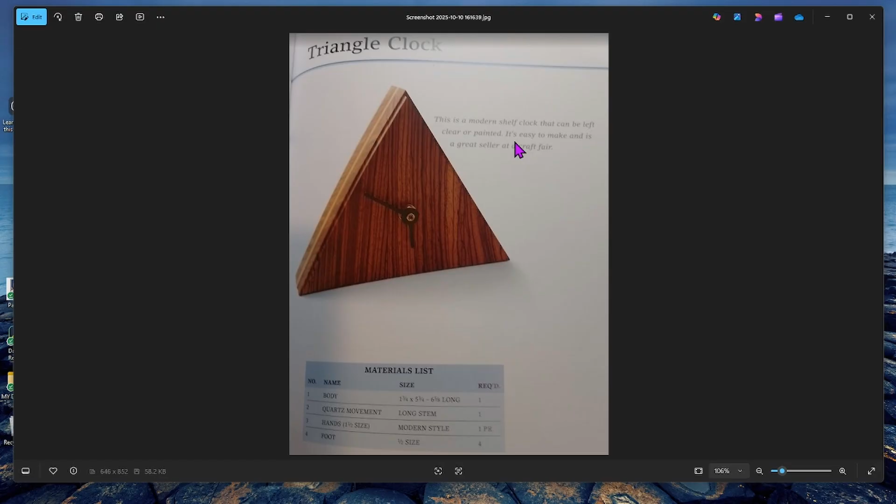This edge right here on the front, it's not a chamfer, it's not a fillet, it's kind of a reverse curve. So let me go to the next page. There you go. So it's probably hard to see, but up in the right corner, I'll try to zoom in a little bit. Maybe that'll... anyhow, right up in there, it's a reverse radius all the way around the edge.

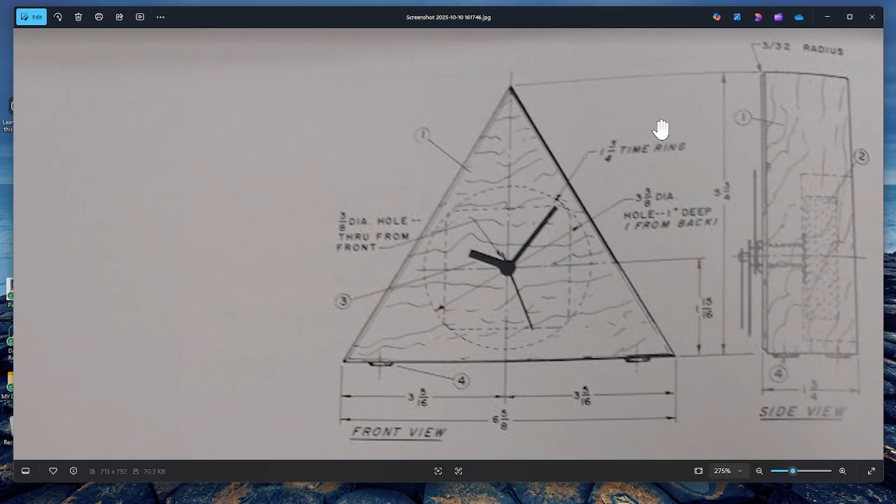There's no feature that I'm aware of in FreeCAD where you can just grab that edge and hit something and it automatically puts that type of—I can't remember if it's called a concave or convex—curvature in there. So we have to manually put it there, and that's the intent of today's video.

Let me zoom back out here. So we're only going to focus on the block of wood here and putting cavities in it and the holes through it. At a later date, when we get more into assemblies, then I will likely pull this up in future videos.

So if you plan on following me in the future, you might want to save this one. And what we'll do is model the actual clock that you insert the hands and the washer and the nuts and the feet that go on the bottom of the clock, things like that. We'll do that at a later date.

But today, we're just going to do a simple triangle. We're going to pad it. We're going to put the holes in it, and then we're going to work on that special edge.

All right, if you've been following my videos enough, or other people's videos, by now you know how to open FreeCAD. I don't need to do that. I'm just going to go right to parametric part, right up here in the upper left. First, I need to turn the mouse on—I keep forgetting to do that. It is on, minimize it. There we go, that'll help you track it a little better. So I'm going to select parametric part.

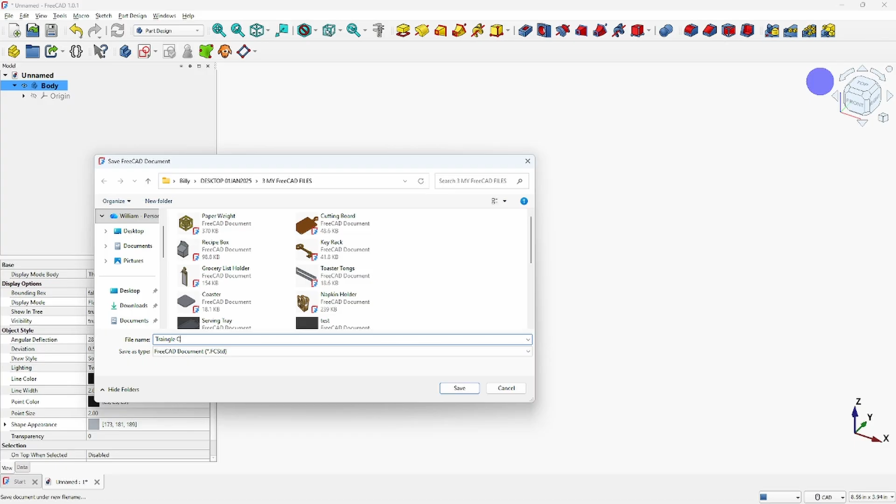I'm going to do what I always like to do: I'm going to save this file, same with my other stuff. Now the triangle clock—I have never done this before, so I've done special edges, it's been a long time, but hopefully I can make it work. If not, you're going to see my humiliation today. I'm going to call that a triangle clock. Triangle clock, and save. There we go. All right, so down here on the lower left, you see triangle clock. On that tab, we're ready to go.

I'm going to rename this body, I always like to do that. Who can remember what function key you press to do rename? I'll give you a second there. I can right click it and rename it too, but it's function key, I hope I'm right, 2. I was incorrect—yeah, I was correct, I just did not have it selected. All right, so it's function key 2 on that body, and I will call that triangle clock.

Work on my spelling. And this will come in handy when I pull it up later and I show you how to model the other parts and we build an assembly and put the clock together. So for today, we're just going to have this block here, or the, yep.

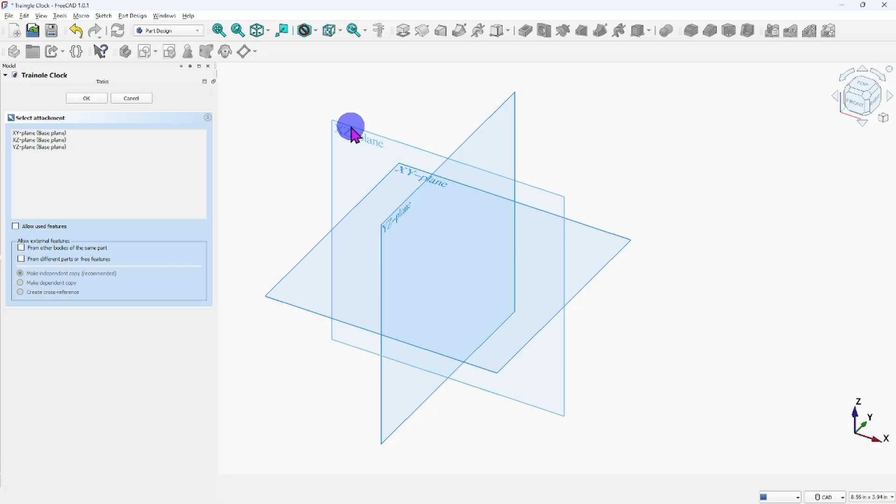All right, let's get into—once you create the body, I keep calling it a block—once you create the body, then your next step here is to use the sketcher and select a plane. You know, you could use any three of these planes, it doesn't matter, but since the clock is upright, I'm going to select this XZ plane. I'm going to double click on that with my left button and bring it up there.

Alright, I know we got a triangle. I want to build the triangle on this line and use this for the center. Man, it's really been a while since I've done a triangle. It does have a center feature. We have a triangle and there's a red dot in the center, showing there's a center point, and then you have the other points of the triangle.

The issue I'm going to have is not all angles are going to be equal, so it's not going to be an equilateral triangle. I'm hoping it'll let me change the angles. It should, so let's go ahead and give it a try.

Hit left click triangle, select the center point. I'll go ahead and use the origin there. Select that, and then you can see spinning it around. I'm going to set that tip right there.

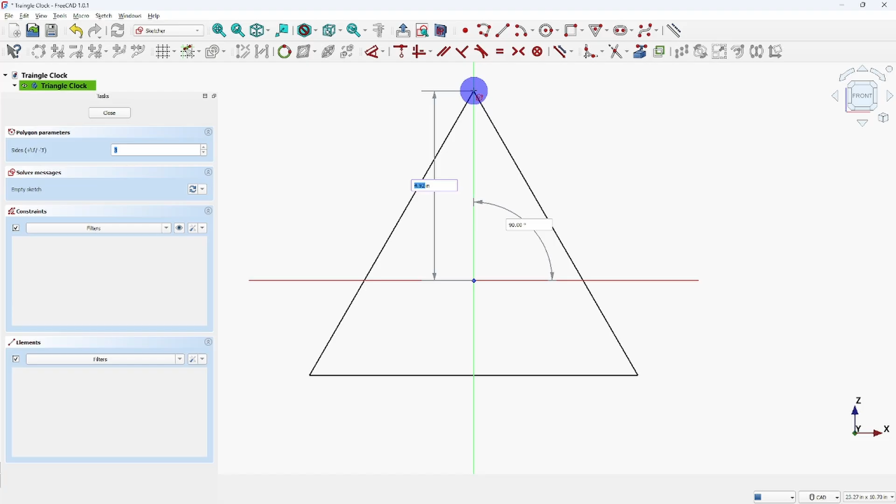I can see that it's about 5 inches tall, and I've already looked and the clock is about that height. So I'm going to go ahead and left click, and there we go. Yeah, this is equal.

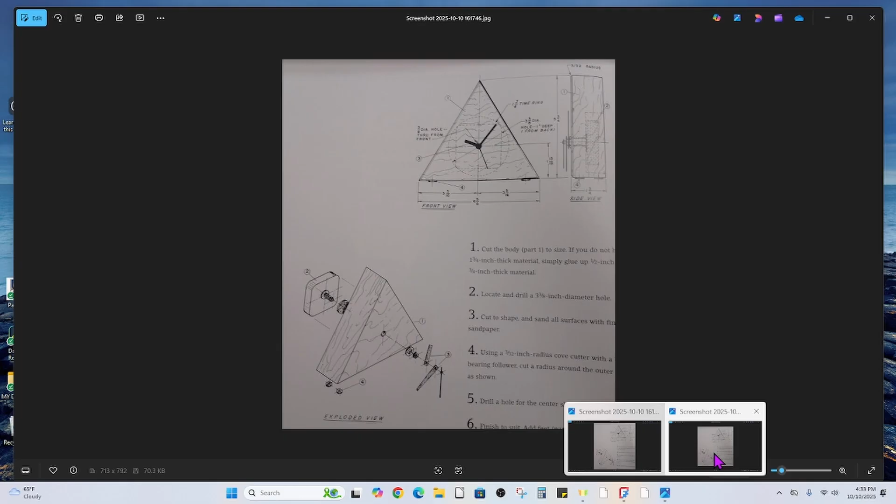Let's keep going here, maybe we can change the angle on it. Alright, I'm going to pull that up. It's 6 5/8 across the bottom, and then we want 5 3/4. So 6 5/8 and 5 3/4. See if my short-term memory can remember that.

Alright, so I'll select that line and we'll go with 6 5/8. Now, this input is not good with fractions, I think I've already tried that. So what I'll do is use decimal. 6 5/8 is 6.625 inches. Haha, that's interesting.

So what I would have to do here is make this line, right click. Maybe I should not have started off with a triangle, but we'll try to see if we can make it work. I will select this line here and try to constrain it to horizontal. Let's try that. Okay, it's saying it's fully constrained, but the height here is probably not going to work because these are equal.

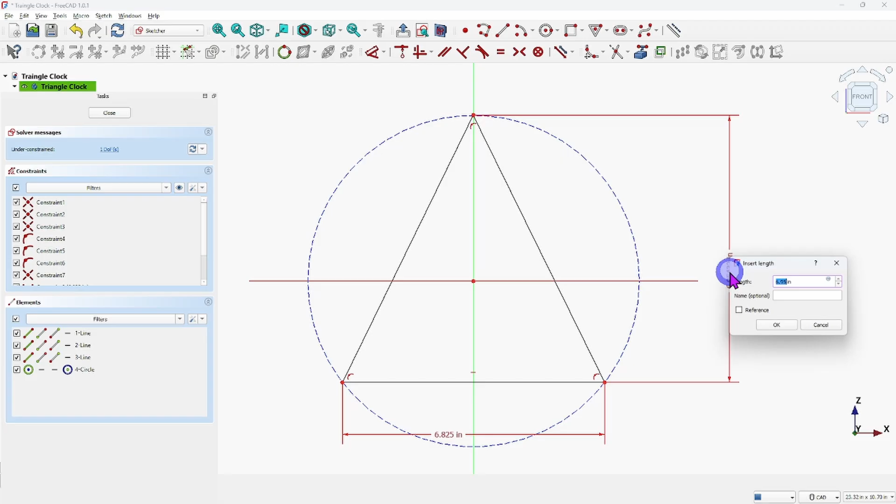Alright, so in the sketch, we want a height of 5 3/4. Come back over here, FreeCAD. This time we're going to go from this point to the top point here. I'm going to hit this auto dimension, pull it over to the right, and type 5.75, enter. Alright, that gives us our shape.

We're under constrained, we got 1 degree of freedom before we can pad this triangle. Let me see, I've got height, got that. So I believe what I have to do is one of these dimensions has to be referenced to either this vertical or horizontal line. So what you want to do is just grab any line and kind of drag it. I'll grab this line with my left button, hold it down, and you can see how that top line right there, that point is not coincident with this vertical line here.

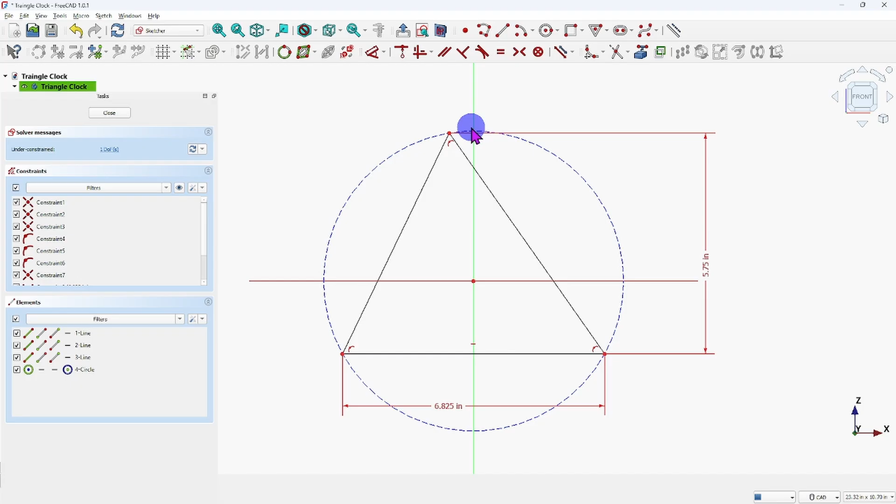So what I could do, a couple ways to do this, I'm just going to make this point here and this point align vertically. Go here and put a vertical constraint on it. There. Perfect, so now we've got that triangle locked in. We're fully constrained. I'm going to close it.

I'm going to scroll back a little bit. I'm going to pad it over here on the left. And I forgot the thickness. That looks like 1 3/4, I'll go with that. You can see my high-tech photography here is just kicking in. Alright, so 1 3/4. Go back to FreeCAD. It's already highlighted blue, so we should be able to just type it in. 1.75. Uh-oh, nope.

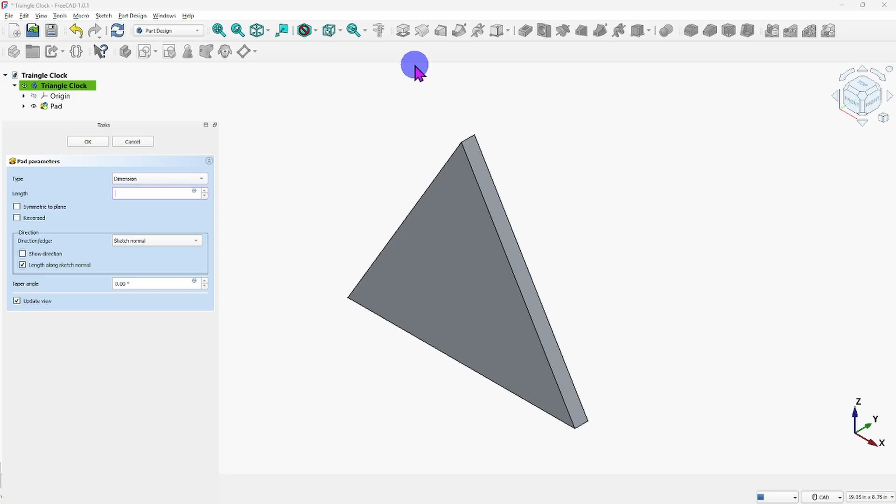Alright, let's go up here and select this isometric. I lost it. Okay, there we go. And then I'll come over here and I'll just backspace, and then I'll type in 1.75 and enter. There we go. Alright, we have our triangle.

Alright, so with this being the front, we will have a hole drilled through it. We also, on the back side, have to put a cavity in there for the clock. So let me go ahead and start with the back side. Select that face. If you remember from the last video, you can now select these faces here. Left click on the faces and select sketch, and the sketch will automatically align to those faces.

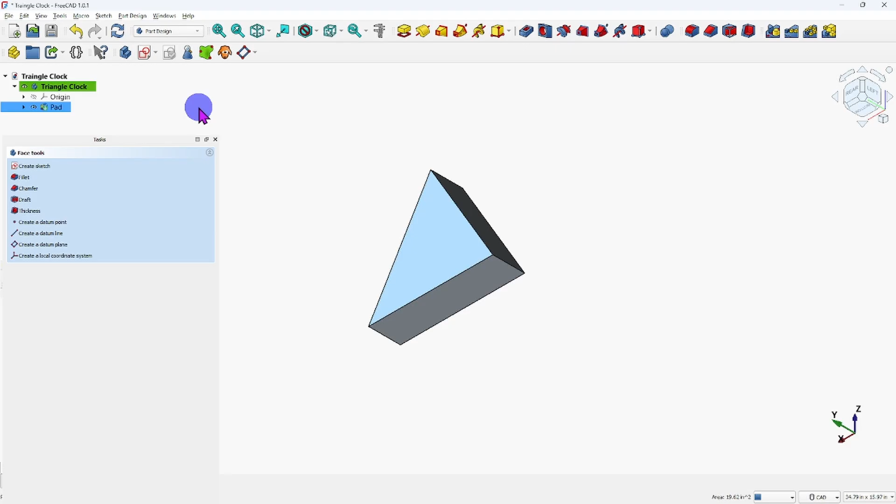So I'm going to start back with this isometric view here, and that is my front. Now I'm going to, like this arrow up here, or remember this dot up here will just do 180. So I'm going to do that, flip it around 180. There's my back side of the clock. I selected that, then I selected sketch. Yeah, I know it went upside down, that happens. I can't explain it at the moment, but here we are. We're on the back side of the clock. What I'm going to do now is just kind of rotate it around a little bit.

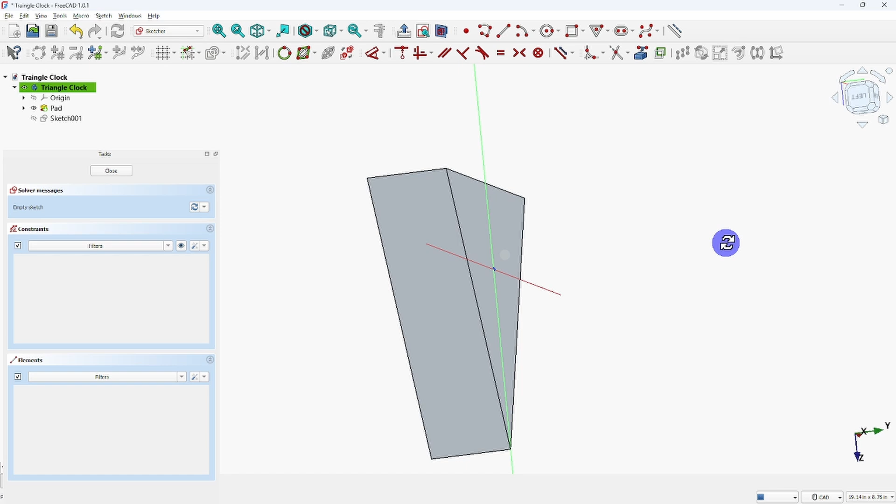There you go, to show you that we are on the back side of the clock. I'll select rear there. That is really strange, that's messing with my head. So I'm going to go up here and hit this arrow on the right just to bring it around. One more, there we go.

All right, let me see where we got to locate that cavity. I see the dotted line. It's going to be 3 3/8 diameter and 1 15/16 up from here. So 1 15/16 up, 3 3/8 diameter.

All right, we can do that. Circle. I don't want to put that there because it'll lock in on that origin point and we won't be able to move it. It'll be constrained to that point. What we do want to do is lock it onto this line, and it really doesn't matter where you put it. Just to show you that it doesn't matter, I'll just put it here for right now.

And we know it's going to be about 3 inches. I'll just hit it there. All right, 3 3/4. Yeah, my short-term memory's kicking in, or not kicking in. 3 3/8.

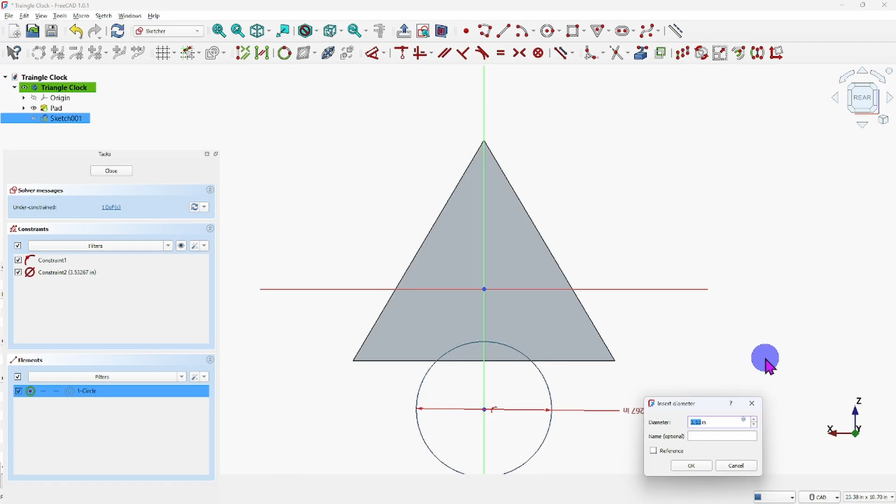But I'll see what I can find out and let you know. All right, so 3 3/4, 3.75. Select it there. Right click to get out of that. I'm just going to grab the circle either there or by the center point. I'll grab it there, and it's locked to that line, so I'll just slide it up into position there.

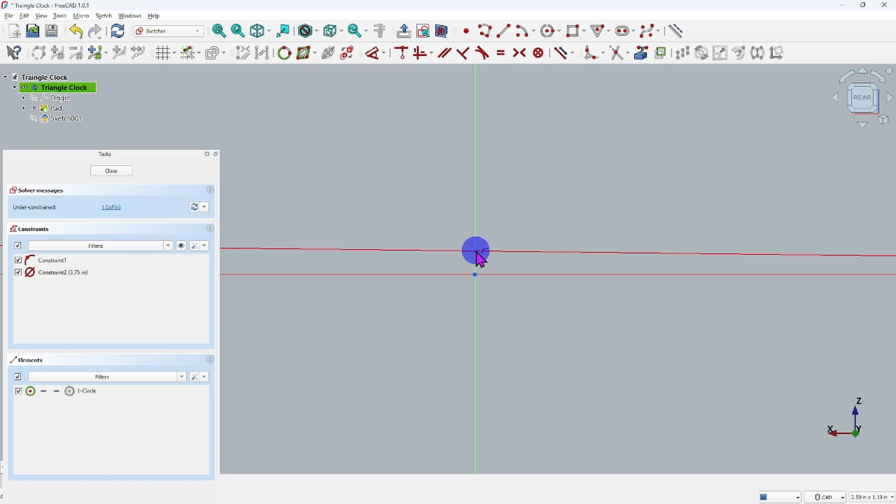And now we're going to put an actual, I'm going to zoom in a little, I'm going to put an actual dimension to it. And it was supposed to be 1 15/16. So let's zoom in, make sure I got that point. Select that point, come down. Oh,

it won't grab that line because I haven't brought it in yet using the reference command. So I'm going to right click, click again. In order to use this line right here, I'm going to have to use this, which is external geometry. Since we use the face of that triangle to give a plane for the sketch to land on, we still have to grab these lines and pull them in to reference them. So that's what this command does right here.

So I'll select that, come over here and grab this line. There you go, you see it turn blue. Select it, now it's kind of purplish. I'll right click to get out of it because I really don't need it now. And that's going to stay as a reference line. It won't affect your degrees of freedom or anything like that.

It's there for reference. So now I should be able to go from that line up to the center of the circle, or from this dot up to there. It doesn't matter, I don't think it does. We'll see. I'm going to grab the line and we'll go up, and I can see that center point selected. I select it, you see both of them are selected right there on the left.

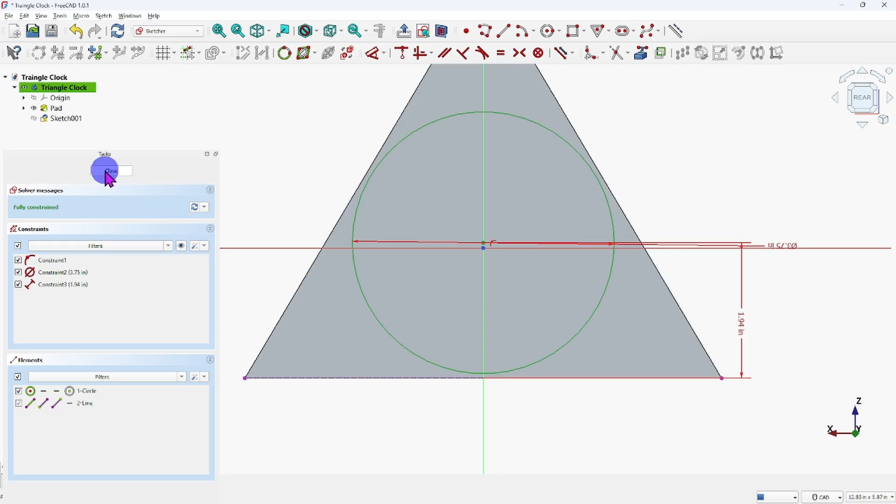So it's fully constrained, I'm going to close it. We've got a line there, and if you remember before, I kept calling this a hole - it's actually a pocket. Use the pocket command. There you go, puts a pocket.

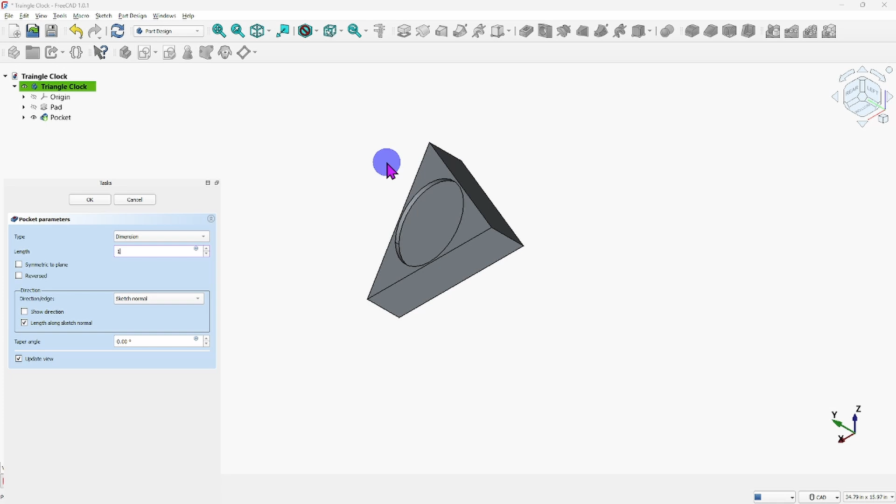How deep do we need to make the pocket? Let's pull up the image. How deep is that? There it is right there, 1 inch deep from the back. Go back to FreeCAD, click in that box, backspace it, just type 1, select enter, and there we go.

We've got the cavity in there for you. Now we've got a couple of options here to put the hole through. I can select this face here and drill the hole through the face front, but then I'd have to do some math trying to figure out where it needs to go. We know it's 1 15/16 up, and then I can center it. But just to make it a little easier, let's take advantage of this circle we already have and select that face right there inside the pocket and see if that works.

Selected, and then we'll hit sketch, and there we go - it's upside down again. That's bugging me. All right, so this time I'll remember to bring the geometry in. Select that, select that circle. There you go, down there. It brought that geometry in.

I'm going to right click to get out of there. It's not showing any degrees of freedom over here because when you bring in geometry like that, it's a reference - kind of hidden to FreeCAD right now, but we can use it, take advantage of it. So we know now the center point is right there waiting for us, so we don't have to do any math.

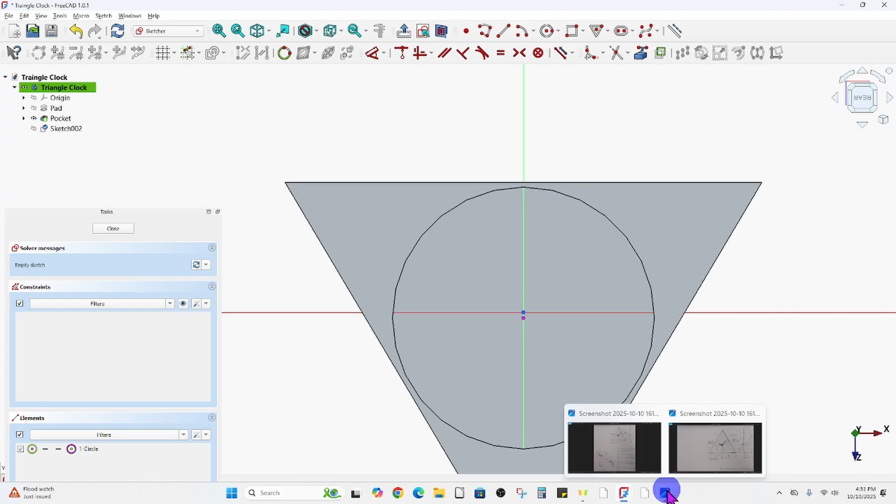Let's put a circle there, but let's find out what size the hole is. And it is 3/8 diameter. Go back. So now, put that circle, zoom in a little so I make sure I got it.

There you go, it doesn't matter how big you make it. Put it - oh, you know what, this is a good time to show you something. While I'm dragging this around, before you select your left button, while that dimension is blue, you can put your dimension in right now. So what was it, 3/8, 3/8, hit enter, and there you go. I'm gonna right click to get out of that.

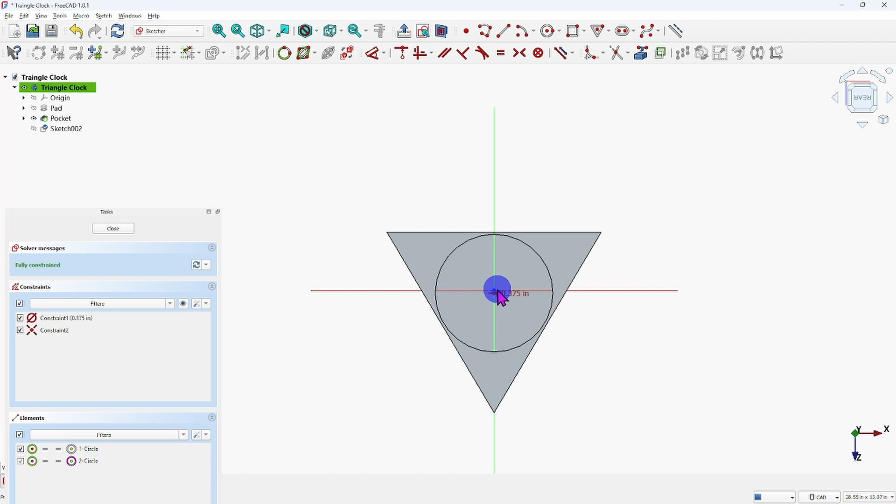It's fully constrained, let me make sure. 3/8, yeah, okay. 3/8, and that is diameter. All right, I'm going to zoom back here. Let's close, we're fully constrained. All we had to do is get that reference, find the center point, drop a circle on there, close it.

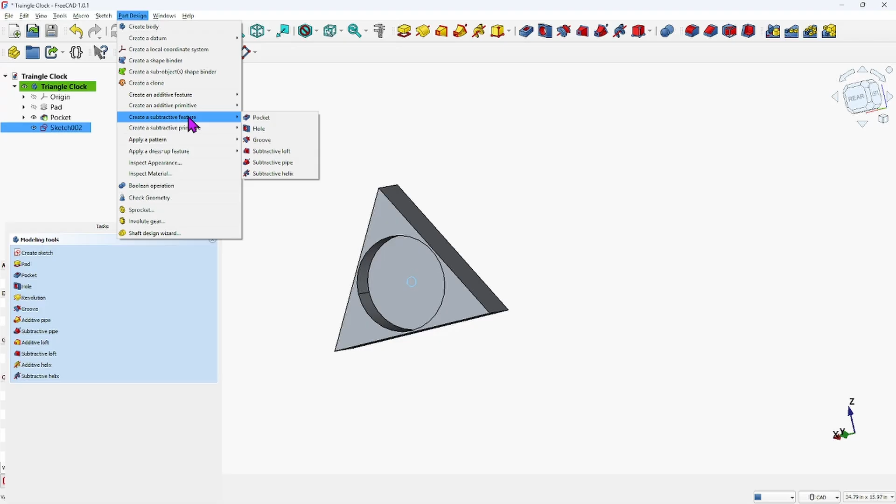There's our circle, and now this time we want the pocket to go all the way through. Pocket there or pocket here - let's try it over here this time. It really doesn't matter, it's just two ways of doing it. And we can do it here too - what would it be, a feature? That's additive stuff, subtractive features. There's a pocket right there. Let's try that, just 3 ways to do that.

You see the impression it made. We want to say through all, and roll around. And there you go, went all the way through. Yay. All right, I'm going to select OK, I'm going to reposition it.

It'll put a fillet on here. Let me just try that real quick and see. You can grab any one of these lines here on the face of this clock. Let me just grab this one here, grab it, and then I'll hit a fillet.

This time it didn't go all the way around, but you can, I guess because it was such a hard break. The last model we built, I selected the edge and I think it was the key rack, and it went all the way around. But because of this hard edge up here, maybe that's why it didn't do it.

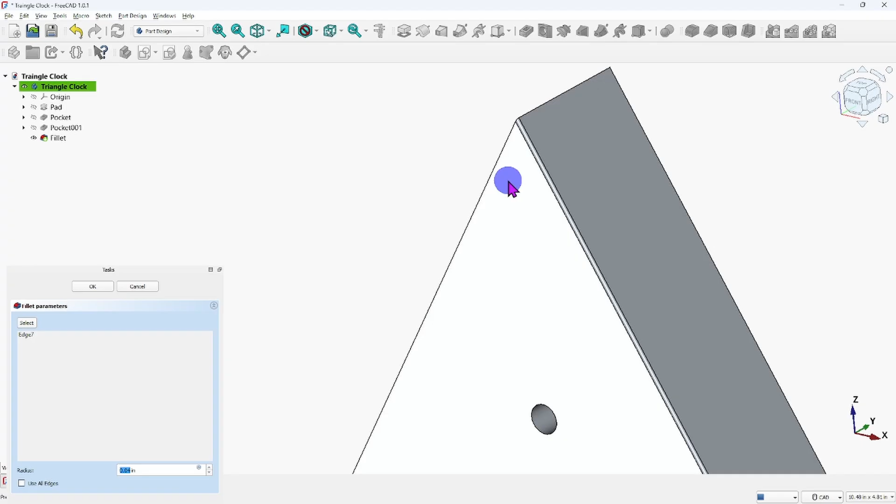But what you can do if you get in that situation, over here you can add edges. But first, just for the fun of it, I'm going to increase the radius. Oh, that's too big, isn't it? Oh no, we don't want that. Let me go, I got to remember I'm in inches. I'm just going to put 0.25.

But I want that to show. I'm going to go ahead and hit OK. There you go.

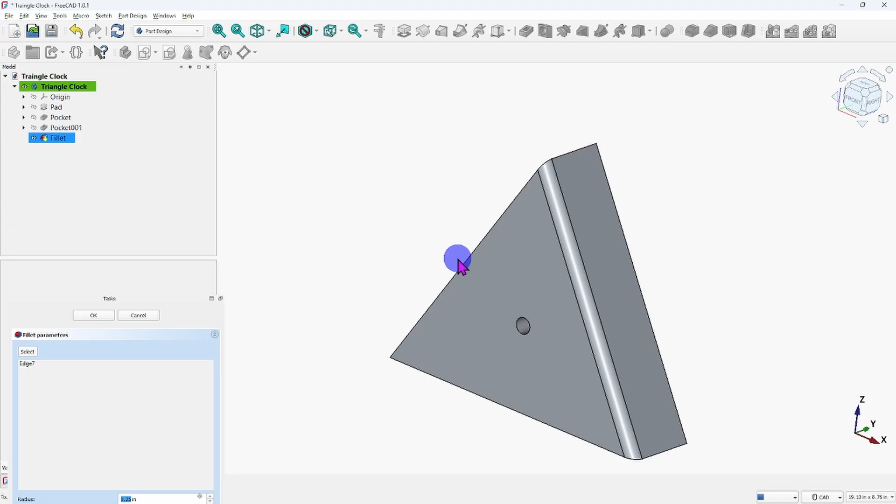Now we're going to go up here, right click on that fillet, and we're going to edit it. There you go. Now we should be able to add these other edges here.

So I'm going to hit select, and that turns magenta, and it's waiting for you to select other edges. So you ease in on that, you see that line, that edge turned blue. I grab that one, grab that one.

It didn't add it over here, so I'm going to try that again. There, it added it. And you can go all the way around and click on any of these edges, but I'm just going to use the face of that. Go back up here and hit that, and bring it up. All right, now when I hit OK, there you go. It puts it all the way around.

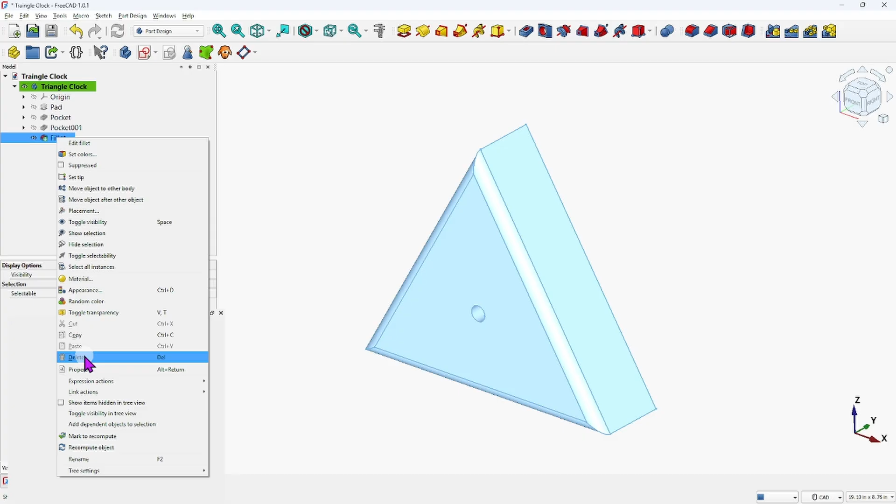I'm going to go ahead and delete that. Edit, delete. There we go. We're back to our 3D modeled item, clock here, the triangle.

Now let's work on that special edge feature.

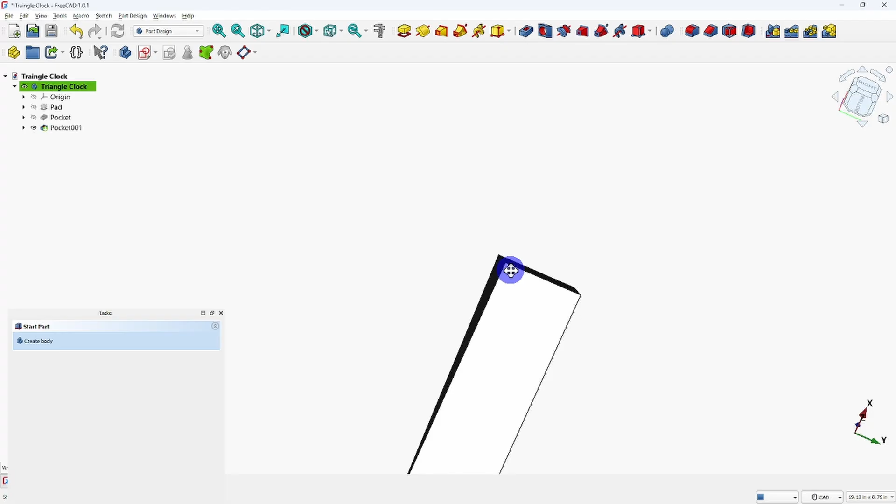So when you do that, you're going to need to draw, let's see if I can explain it to you. We're going to have to draw what we want here. It's kind of a cross section of the edge we're trying to put on there, and then we're going to select a path, like these edges here. Once we draw a profile of that edge, it should go all the way around the object automatically.

It's like using a router bit, where a special router bit that's something other than up here in the upper right, a fillet or a chamfer. And I am going to see if I can pull this off.

So how are we going to do that? We're going to need a sketch of a profile, and then we're going to need a sketch of a line that goes around.

So what I'm going to attempt to do, I know it might be a sweep, I think that's it, where you draw a profile and then you sweep it along a path. If you could read that there: sweep a selected sketch along a path or to other profiles and remove it from the body.

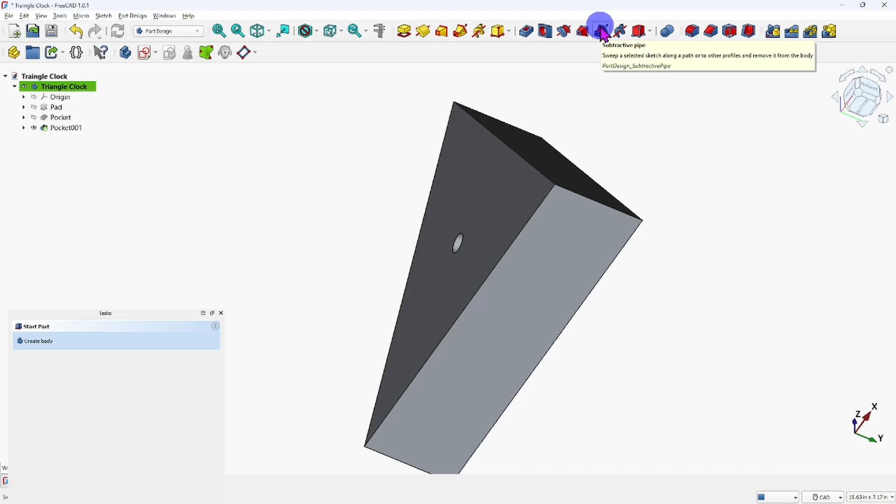All right, let's see if we can do this on the first try. Get back to here. Where would be the ideal place to put that profile? I think what I'm going to do, let me start a sketch.

And it appears that using this YZ plane, I can start that profile. Yeah, that'll work, because it intersects right here, it's not out on the edge. So let me try that.

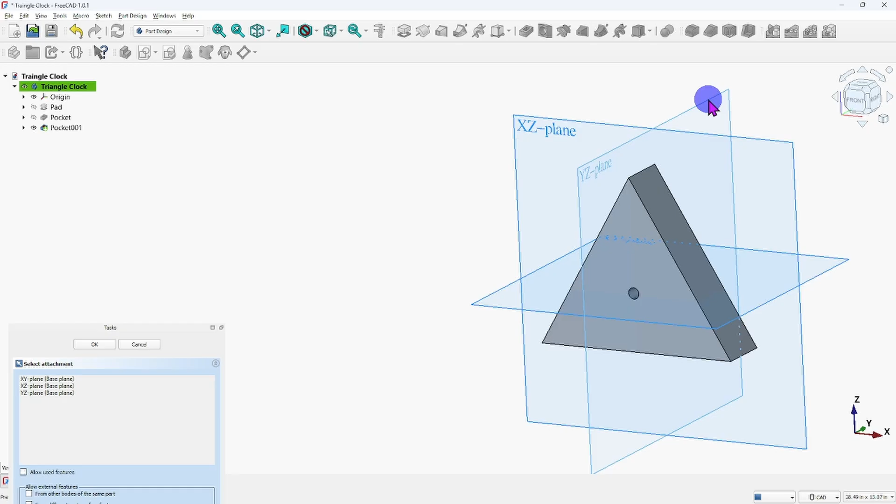I'm going to try the XY plane - I'm sorry, the YZ plane. Let me double click on that plane. There you go. And you see I'm just going to rotate a little bit so you can see what's going on here.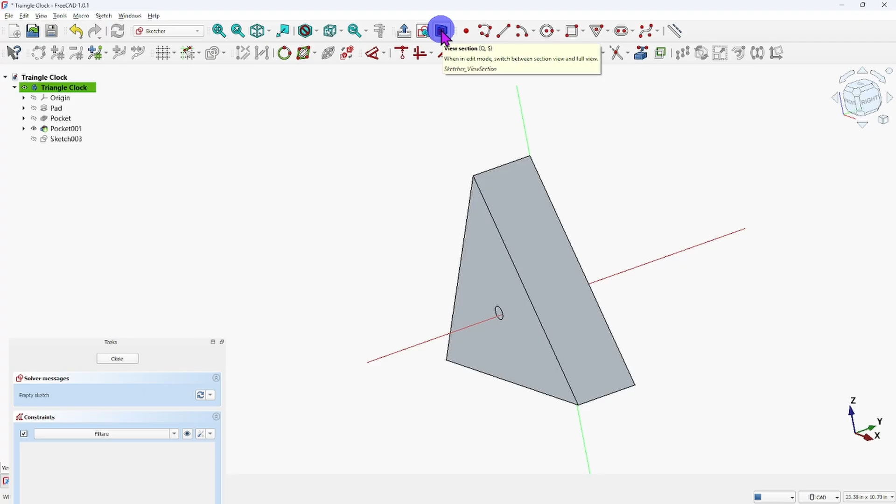In order to remove some of this, because it's in our way of drawing, you use this command up here, view section, and it'll automatically, let's say, slice to remove the interference. There you go. So now when you draw, it doesn't cover up what you're drawing.

All right, so I'm going to select the right side here. Now I got to get here. The problem I'm going to have is, will this geometry allow me to bring that edge in? So let me try that. Oh yes it does, yes it does.

Okay, right, there we go. So that gives me a point. Right click, get out of that. Now let's go look at the image and see what we have to do here.

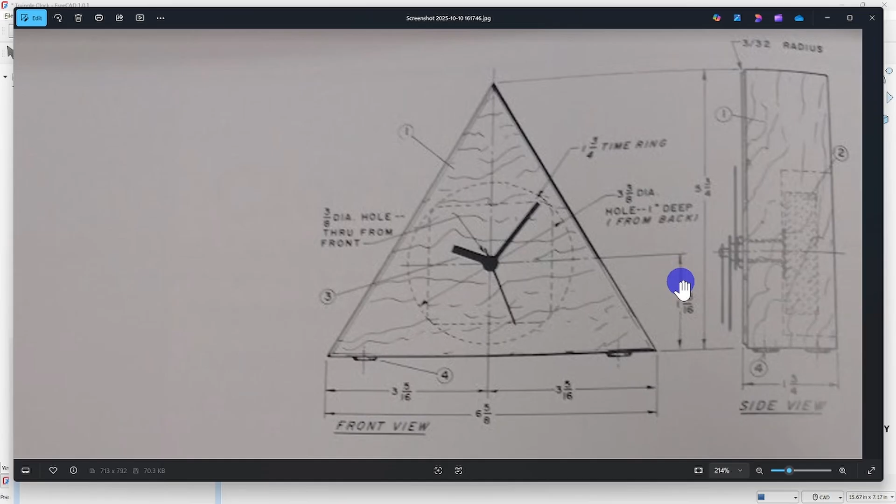And this is about where we're at right down here. So we've got to put a radius of 3/32. All right, I think we could draw right on that dot there. It recognizes the dot, oh that's good. Good.

So a radius of 3/32, we're going to draw this here. And it's looking for a diameter, so 3/32 radius is actually 3/16 diameter. So let me put 3/16 there, hit enter. Okay, so far so good, I believe.

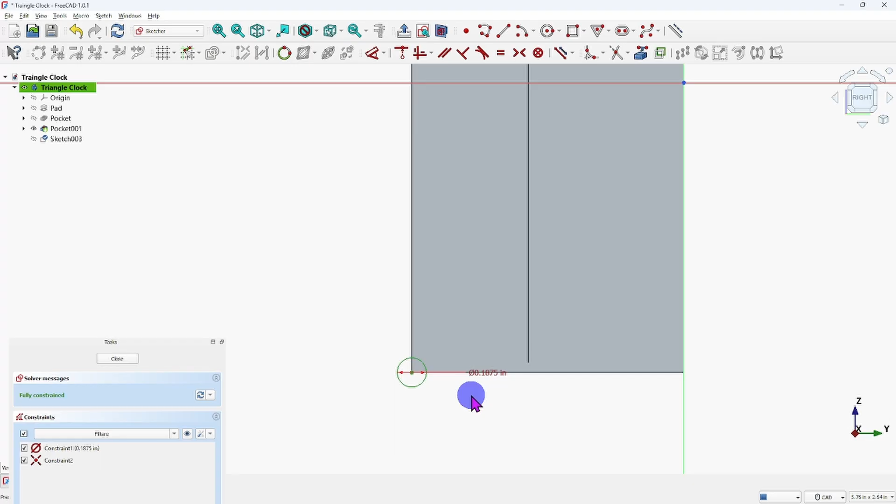All right, that sketch is fully constrained. I'm going to move the view over a little bit and rotate it with my mouse. Let's see, there you go, that circle. So now that circle should follow that path around, and we will subtract that circle from the triangle that we drew.

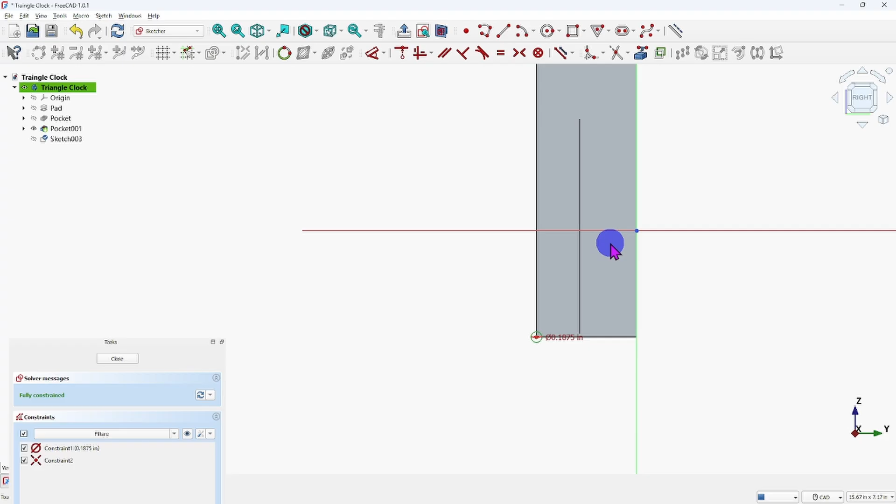It's going to make a little pipe that goes around, but now we need to draw the path. So that's the profile. Now we need the path. I'm going to put this back there, down. All right, I'm going to close it, and there's our profile. Now I need to draw another sketch with a path.

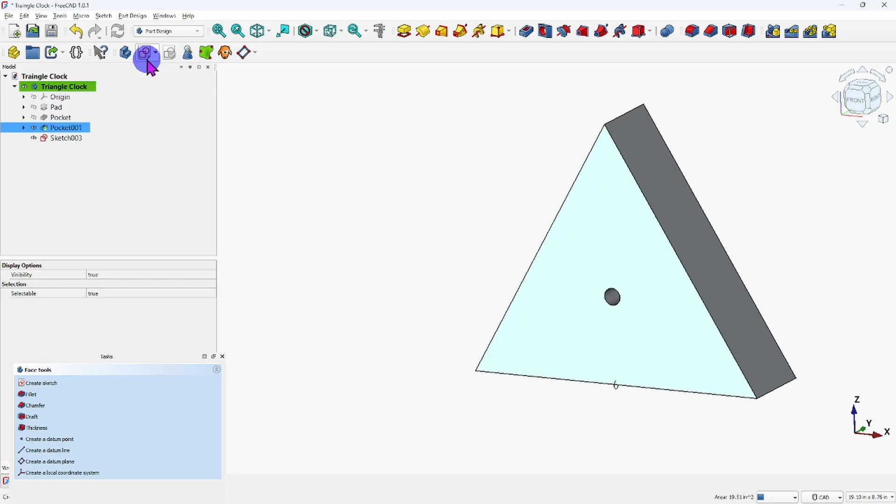So I'm going to need this line, that outline there. I'm going to select this face for the selection, and draw a sketch. Let me write with these lines in here. When you rotate the view, that shows you, since those lines are in front of the object, you're drawing right on that face, just to let you know.

All right, let's bring these lines in, the geometry. All right, select that, and hopefully it will recognize it, and there you go, one.

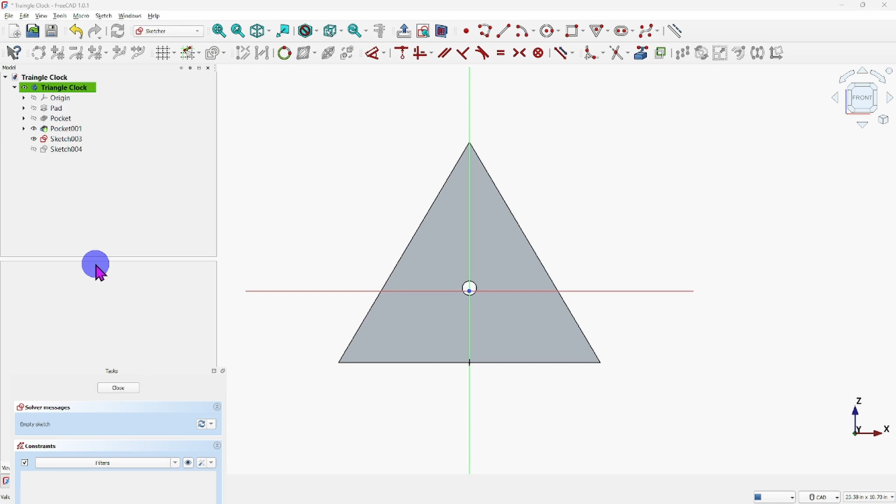I'm trying to get down here to see. Come on, why did you end up down here? Select that, pull it up. I'm trying to pull this up. There we go.

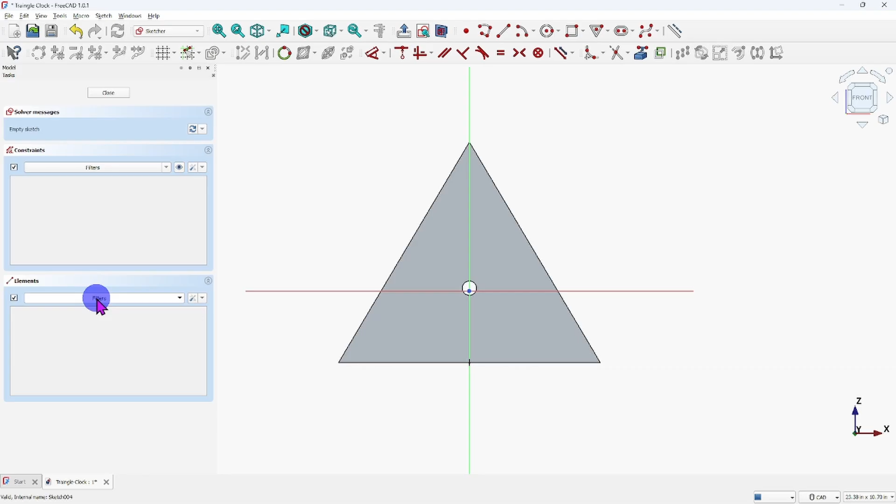All right, I'm going to right click. I wanted to see these lines as I selected them, so let's try that again. Geometry, bring it in. See, that's what I wanted to show right there. I wanted to see it come in. Select this line, select this line.

Okay, it's an empty sketch because we haven't drawn any lines yet. See, empty sketch. So now what I should be able to do with those lines in there for reference, I'm going to right click and get out of that geometry mode. And I am going to use this multi-line command, or a polyline.

Select that and just start on one of these things. So I'll go start on that point, go clockwise around, pun intended. And as we select these points, because they're reference points, you can see over here it's getting fully constrained because we don't have to dimension them when we lock onto reference points. And they're fully constrained and closed.

Right click. All right, I'm going to close it. Fully constrained. Wow.

All right, come up here. Select model. Yeah, I don't know if this is doing it to you if you're following along, but this has rearranged itself somehow, and I don't have time to try to go in and fix it. I really want to get through this, so I'll probably end up doing yet another video on this later.

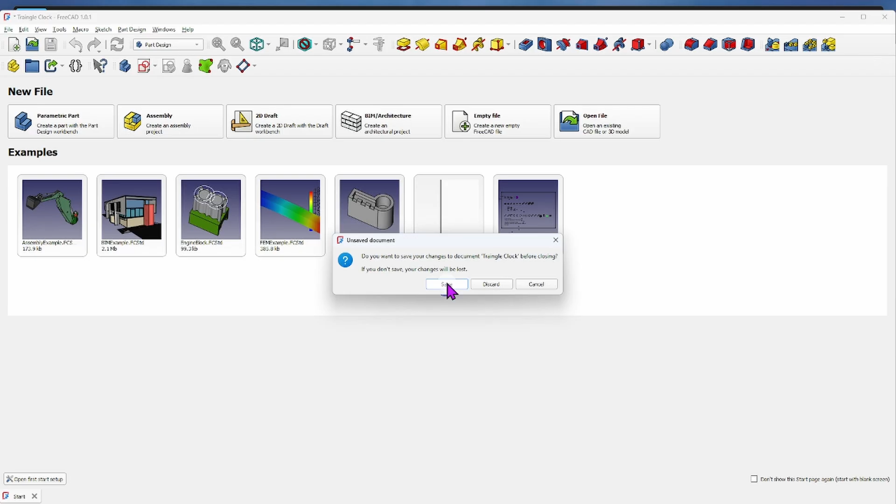All right, I'm going to open a file. There's my triangle clock, and I will open it. And there we go, we're back to having this view. There's something else I have to look into. Pull that up a little bit more. All right, so let me get back to it.

What I was going to show you before I lost or undocked my panels over here is that now that we have these two sketches drawn, we want to hide the pocket, not the triangle. Let me hide the triangle. I think that hides everything. Yeah, because the sketches are inside the triangle. So I'm going to open that back up.

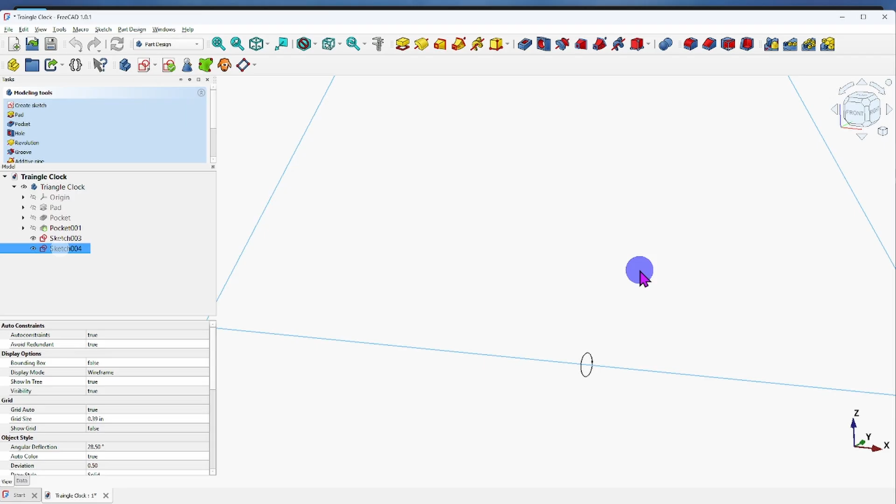And are the sketches in the pocket? They are, but that's what I want. So there you can see the two sketches, that's 3, and then the outline of the triangle is 4. All right, here's where the fun comes in.

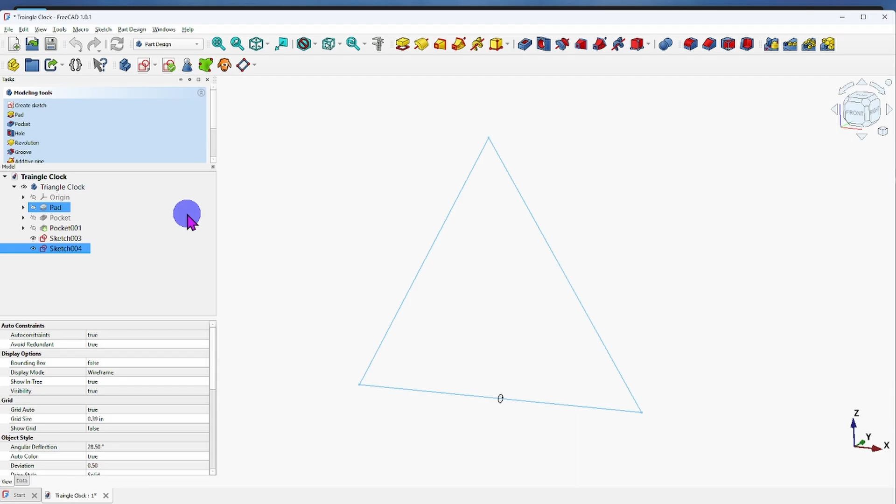So I'm going to attempt to do the subtractive pipe sweep, and I need to figure out what order to select them in. I'm going to assume that I have to select the profile first. Let me do that. It's selected, highlighted, and then if I use this, it should ask me for a path. Let me try that. Select. No spine linked.

Okay, let me close this report view and see if it'll let me add edges.

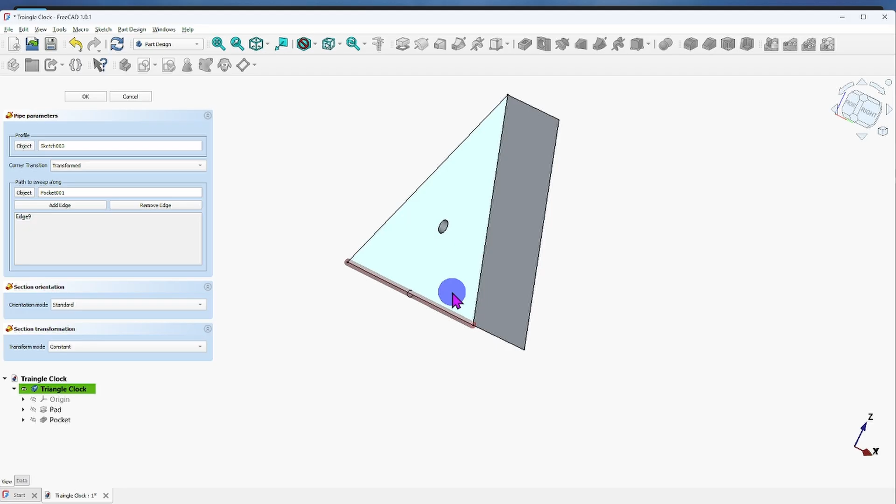First, let me try this one. There you go, look at that. It's letting me add edges. So I selected the profile first, and you can see now that if I hit OK, it's going to do what I want there.

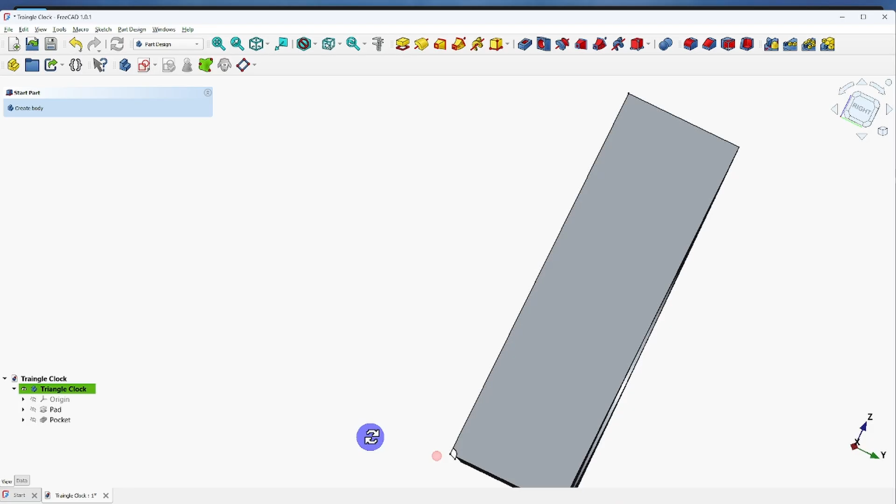So let's go ahead and try that real quick before I go all the way around the clock. Let me select OK. There you go, look at that. There we go, it worked on that edge. We just have to go back, and that line right there that goes around, we'll hide that. But for right now, we do need it.

All right, so my panels have moved around on me. I apologize for that. Hopefully you're doing okay, your panels didn't move like mine did, but you should still be able to see this view right here.

And what I want to do now, we use the subtractive pipe up here. I'm going to right click and edit it, because now I want to add more edges and see where we go from there. So at the top up here, edit the pipe, select that.

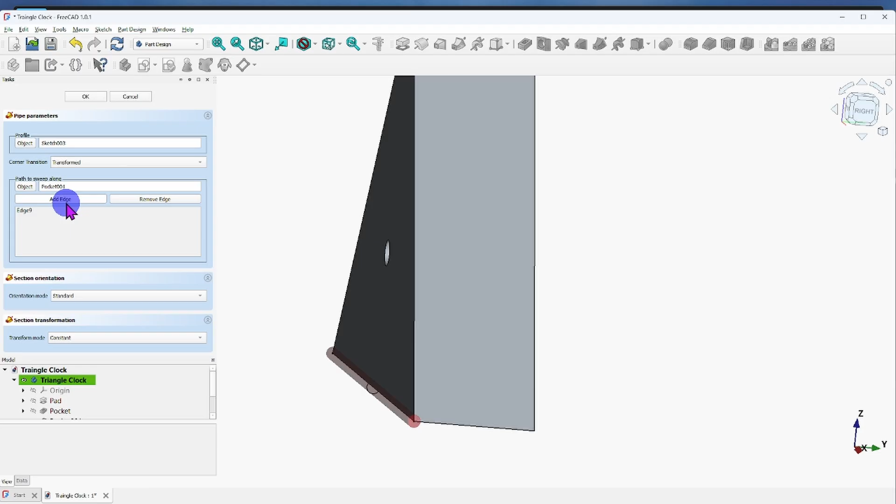And now I need to pull this down so that I can add more edges. I'm going to spin this around a little bit. Add an edge. Zoom in, grab that edge. You see the pipe going around.

Grab that. Oh, I think, okay, it's selected. When I hit add edge, it should add it in. Oh, nope. But now I should be able to select it. You see it's magenta around that add edge, so I should be able to select it now, and it'll add it. There we go.

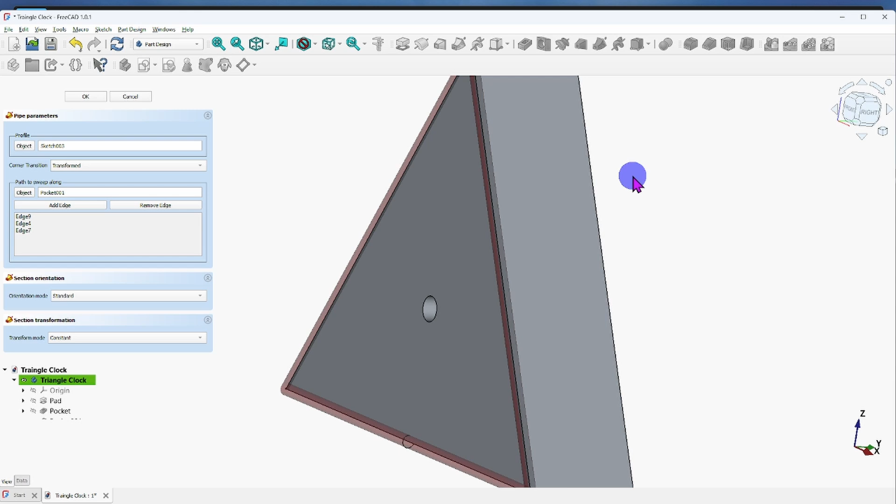So you can see it shows up kind of reddish, the pipe, showing you that it has gone all the way around the clock. But if you notice, that profile right there, as it goes around, it keeps its orientation of left and right. So then when it comes down, it slides down here, you can see that profile is just slid up like that. If it was a router bit, it wouldn't do that.

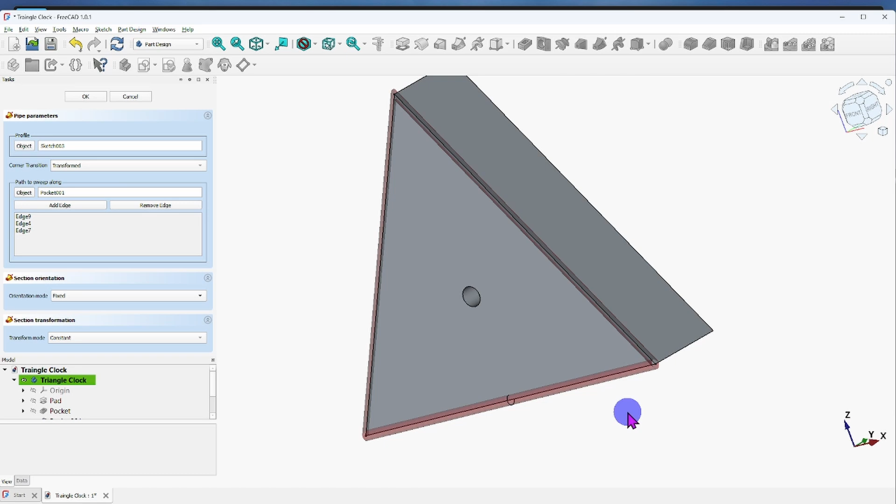So we need to correct that, and I believe the orientation mode is what we want here. I'm going to say we're going to try several of them, but let's try fixed. That didn't change it. Let me try Frenet. No. Auxiliary, and binormal—I believe I'm going to go back to standard, and it could have more to do with the transformed.

Do a right corner. Okay, that might be what we're after right there. Yeah, that's exactly what we want. And just for the heck of it, let's see what round corner does. Oh, it should just round it when it goes around the corners. Yeah, there you go, look at that. That would work too, either one.

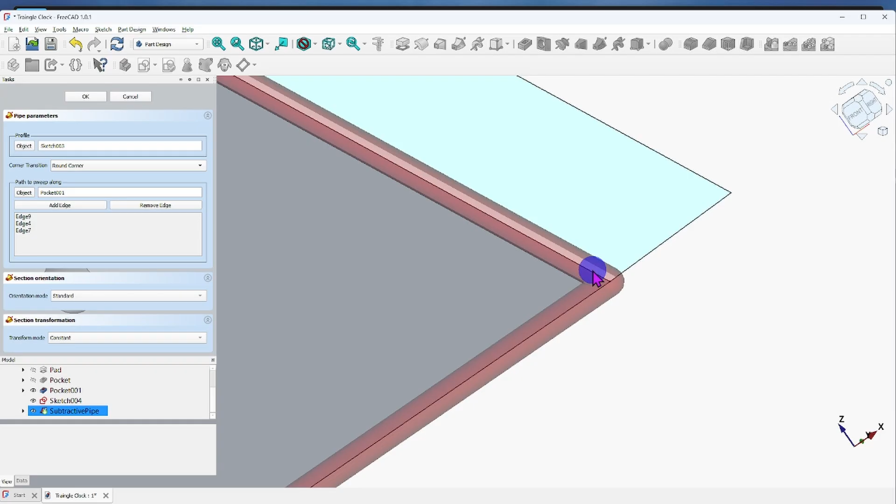Just so it's not that transformed—you see that it just kept its orientation, it didn't turn the corner. It just went here and then it slid up, but that profile is still facing to the left and right as it goes around. So the corner transition is what it is, and in this case, either right or rounded would work. It doesn't matter because that red pipe is going to be subtracted from that material.

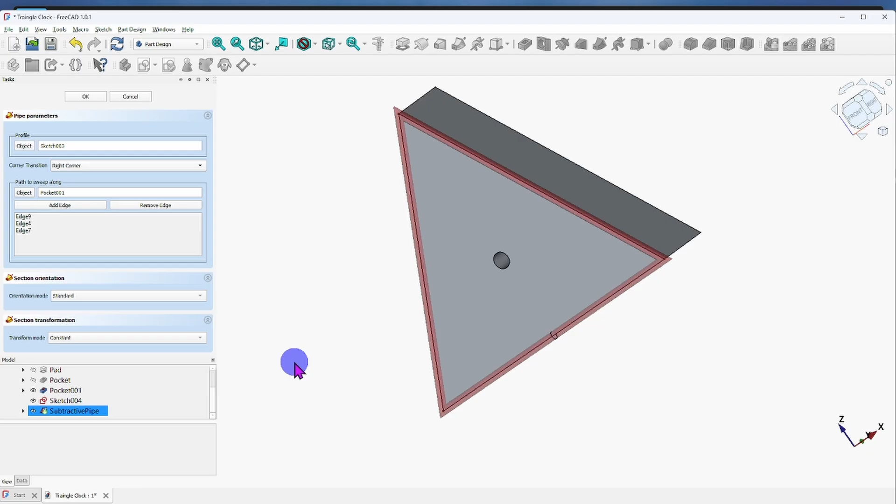So I'm just going to use right corner for the moment, and then I'm going to hit OK. And then we have our edges done. Now we just got to—you see that line right there? That is the path.

I can go down here and let me pull this up, grab that, pull that up. And I believe—there you go. When I select it, you see it turn blue. Now there's a little eye over here to turn the visibility off. Turn that off, and there we go. Wow, look at that. So if you had a router, that's how you would do it around the edges. In a woodworking shop, that's what it would come out to be.

So that profile that we drew, now let's have a little fun with it. The profile should be inside the subtractive pipe. Yep, there it is, see that circle? Let's try something.

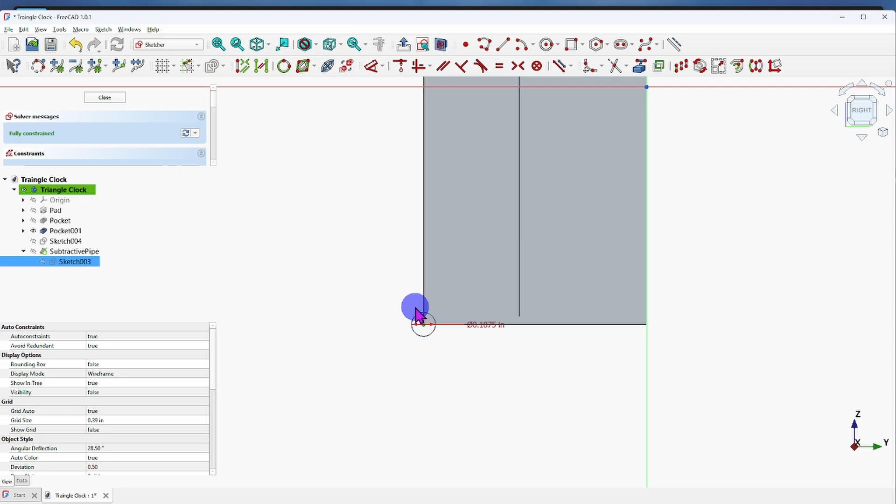I'm in that sketch, I double clicked it. And what I'm doing is now let's just say that we're changing router bits, okay? Just to have fun, I'm going to delete that profile. Hit delete on the keyboard. Try it again, come on, Billy. Select it, delete it. And using that same point...

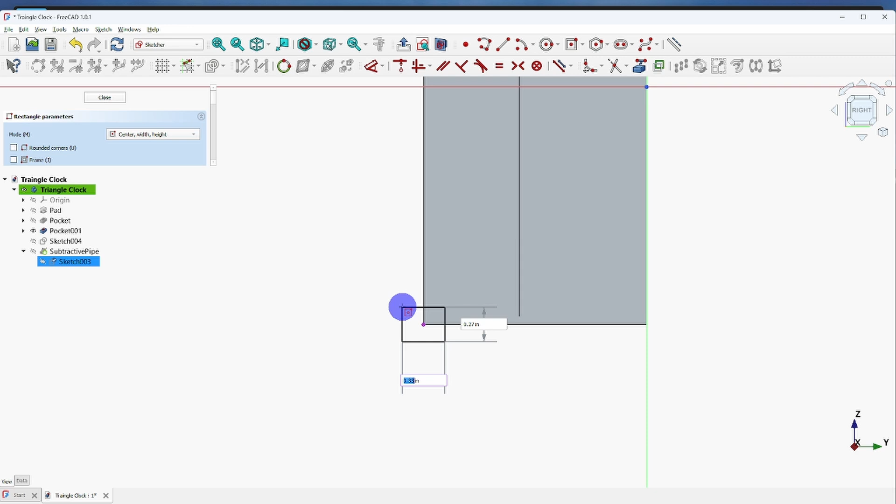Do a centered rectangle, put that on the center, and we're just going to drop it about there. Right click—oh, it's asking for dimensions to fully constrain it. All right, let's comply, just put that and hit OK just to accept the dimensions. We still got one degree of freedom. Grab that line, come out here, OK, just accept it.

Now that profile should run all the way around the path. Let me close it. Oh, there you go, and it updated the view. Cool, huh?

Now let's try that again. This is the profile, which, you know, in the future, these sketches—when you get multiple sketches, you might want to label them. So I want to go ahead and rename that, and that is the path. And then we'll call this—I'm going to right click that and call it the profile.

So now we know when we grab the sketch, that's the path and that's the profile. Now we can have some fun. I'm going to double click on the profile sketch again. Come on, let's see if it works.

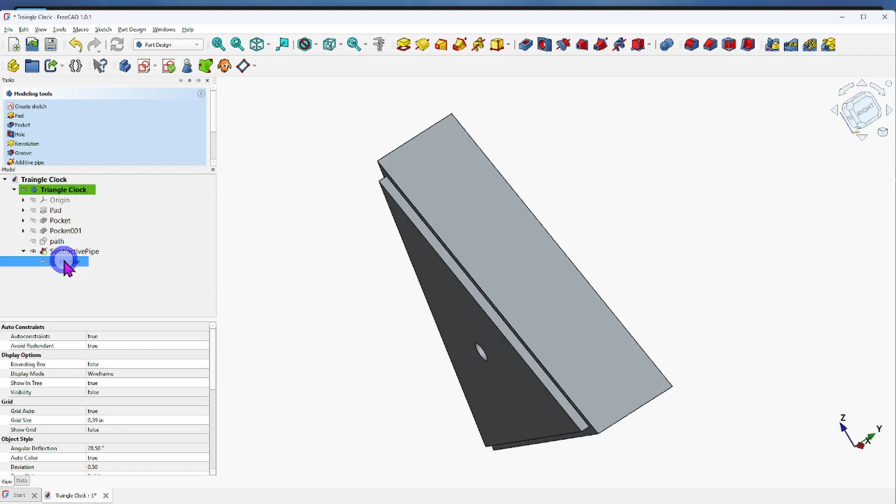Double click. Oh, I think I got to turn it on maybe. Double click. Yeah, I had to turn it on. Make it active.

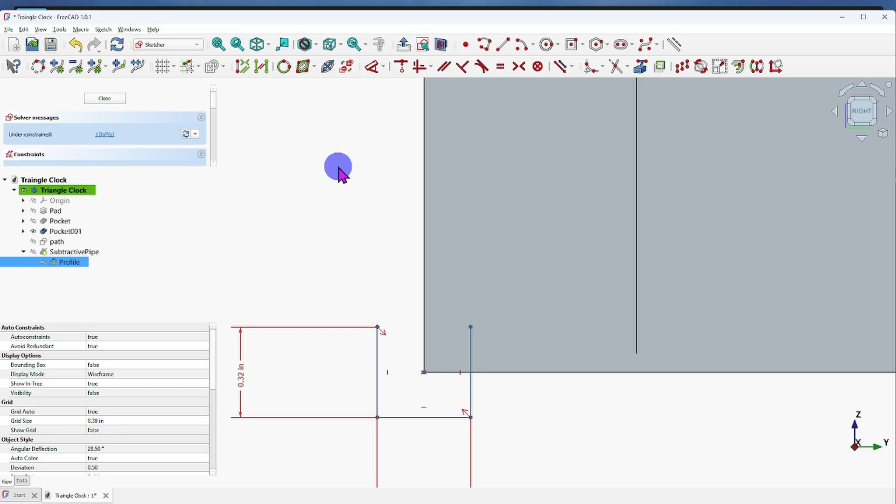Don't delete the profile sketch, but once you open a sketch, you can select it and hit delete on your keyboard. It's going to make me select one line at a time. So instead, in the upper left of this view, hold down your left mouse button and drag it, and it'll grab the lines and points. Then hit delete on your keyboard and it all goes away.

Let's try that. Oh, I got rid of my reference line. Let me right click and bring that back since I dragged it. So bring the geometry back in. Boom, there we go. Now we got our endpoint.

All right, now let's try this. Select center point and... I don't know, I'll put them right there on that reference line.

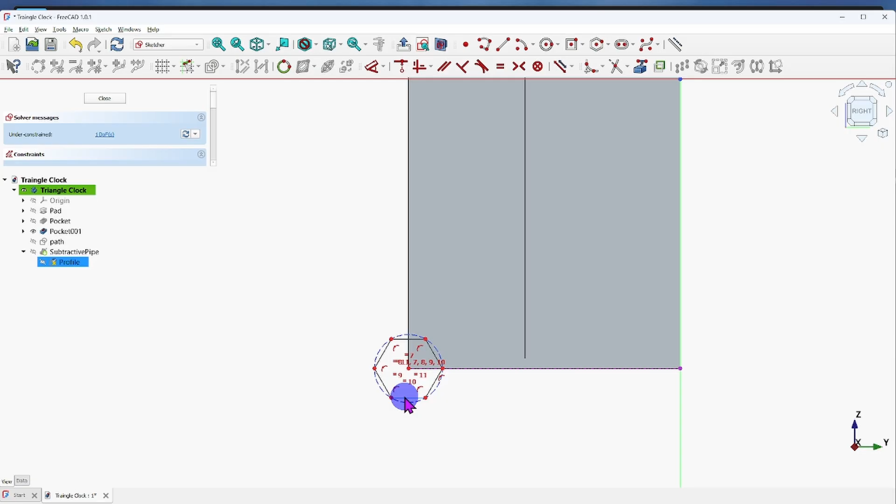Right click. Should be able to grab that line, give it a dimension, yeah, and it'll fully constrain it. You can make that whatever you want, but I'm just going to select OK. Now when we close it, you can see it's going to put that impression all the way around. Let me close that. All right, did it update? Yep, it did.

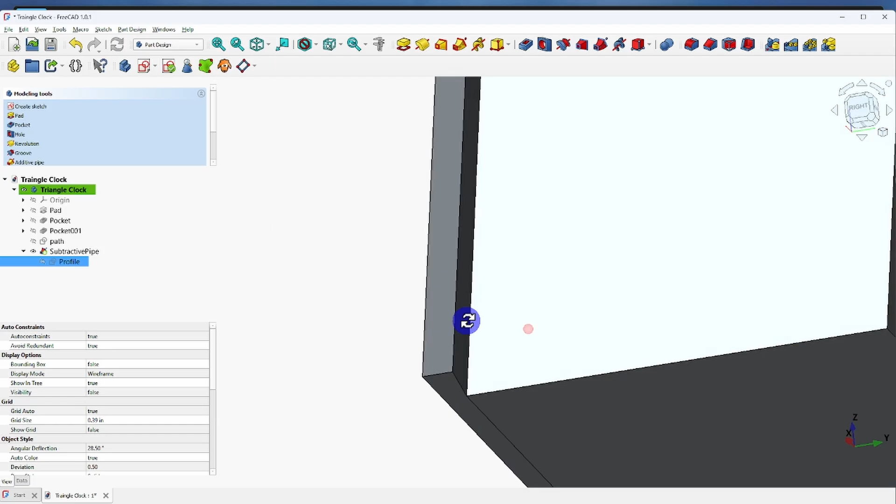I just have to turn the profile off over here, that eye selection, and there we go. Look at that. All right, we'll do one more profile and call it quits.

I'm just showing you that once you build a profile on a path, you can change the profile, and it's like in woodworking selecting a different router bit. So let me turn it back on and then double click it, left click, go back in here.

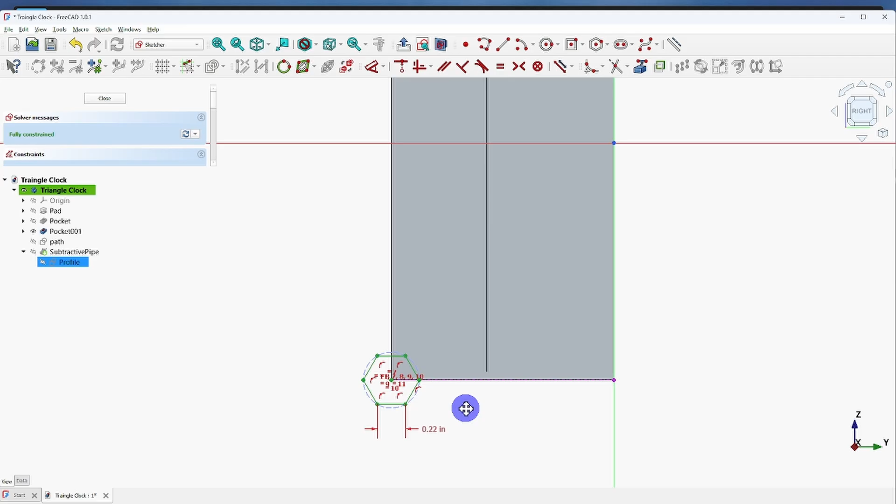I'm going to drag backwards this time. Select that and then hit delete. It still went away, I lost my line. All right, we hit geometry, select that. We got our endpoint to do another profile.

What should we do? I'm trying to get crazy on this one. The slot. Maybe we can do something like that. Put it on that endpoint. Oh boy, what the heck? Put it right there.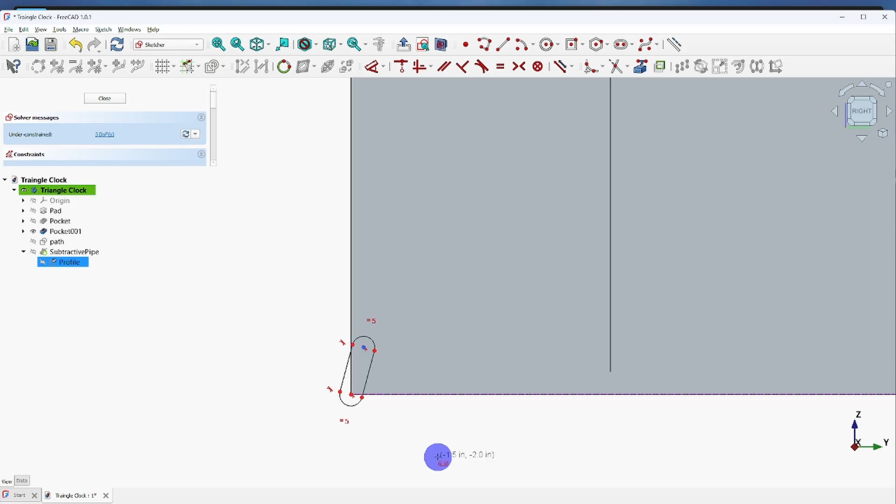Right click, I want to dimension that line. Auto dimension. Okay, 2 degrees of freedom. And grab... oh, it doesn't like that. Go out of that, I'm still going to put it there. There you go, hit OK. 1 degree of freedom.

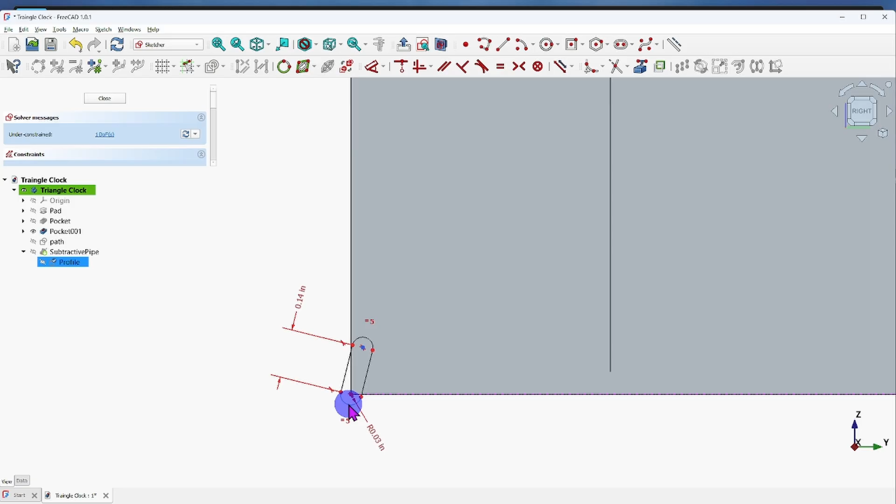And what is that freedom? I'm going to right click and grab it, move it around and see. Oh, there we go, it's the angle. I mean, we can make it straight up like that. That would be cool, but...

I think what I'm going to do is just put an angle from that point to that point, and an angle. It's not working. All right, I'm going to go. If I just do that and then hit an automatic dimension, yeah, I figured I was going to run into that problem. I'm going to move it around until I get green.

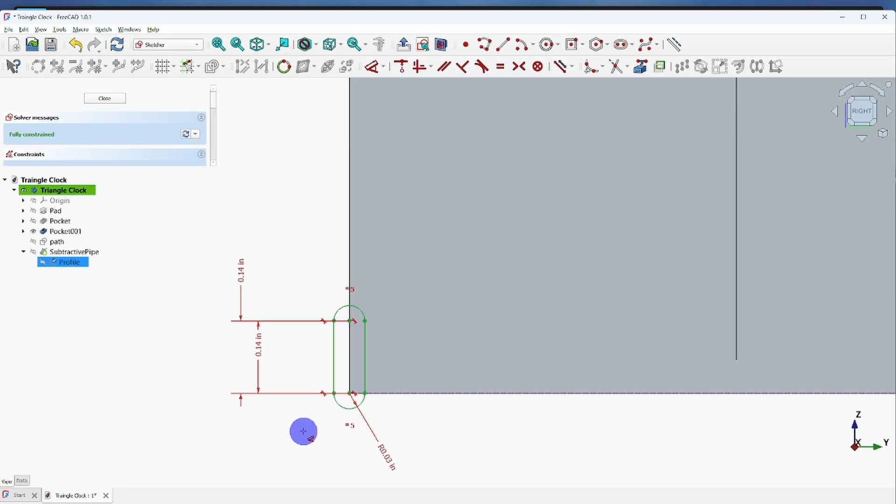There you go, green. It liked that right there, so I'm going to keep that. Hit OK. Oh, come on. I'm going to undo that. I kind of want to see what happens when it goes all the way around, so I want to keep that. And I could just hit close, but I do want to do constraints here.

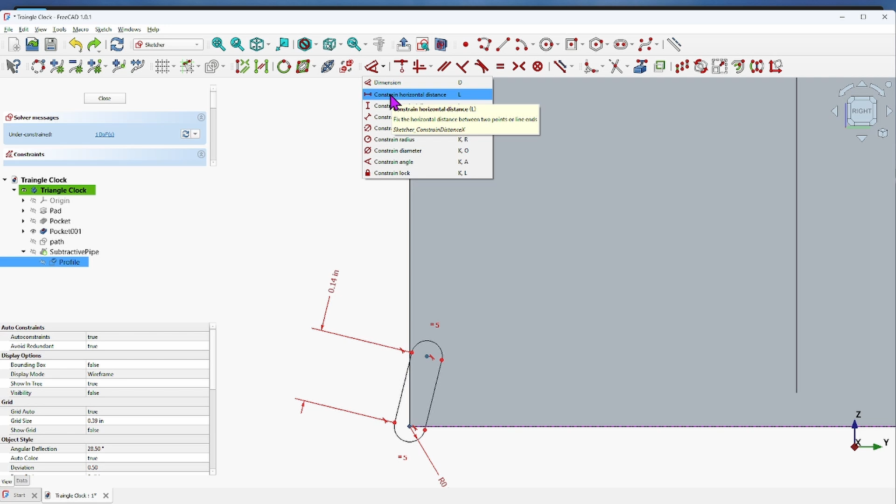So what I'm going to do is go from here to that point, horizontal. I'm not going to let the auto dimension do it for me because it's not working right. There are situations where it's just going to give you trouble. So I do know I want a horizontal constraint there. There you go, look at that. I accept it, and now we got that locked in.

So let's close it and see what it gives us. That profile all the way around the clock. And then we want to turn the profile off right there. That's cool.

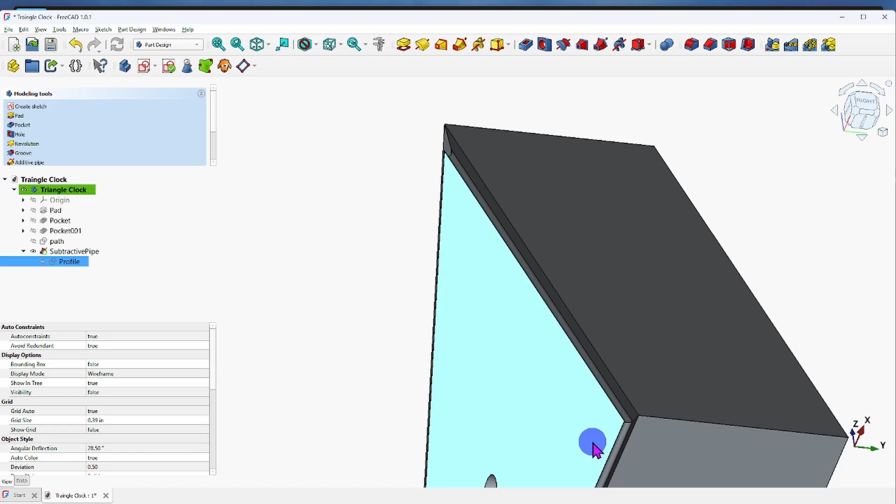Okay, so that profile is cut all the way around the clock. That's like kind of a slot undercut right there. I doubt you'll find a router bit for that, but I'm just showing you the flexibility and fun you can have with stuff like that. So that's it for learning how to do a subtractive pipe around the edge. I'm trying to give you other options to go around edges rather than just a fillet or a chamfer. Because of the many router bits out there that offer different profiles, you should be able to do it here in FreeCAD, and that's how you do it.

So I hope you learned something from that, and I know I need to go back and look at what happened with my views getting moved around. There's a couple of things in this video I need to revisit, and I told you I'd look into them and give you answers in the next video, so that's what we'll try to do. All right, let's give this one a color like we've done on the others.

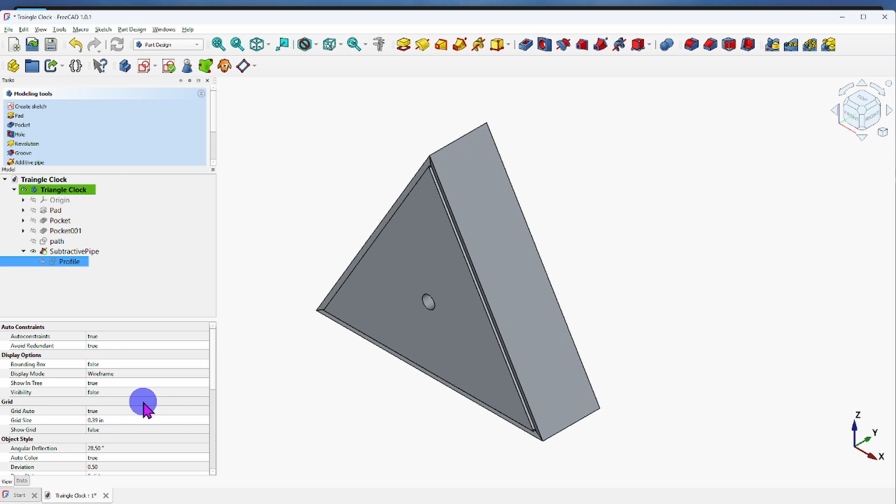Hit the triangle clock, come down here. You know, I don't think we covered transparency yet. Let me give you a little bit of that. See this transparency line here on the view tab? Let's make it transparent so you can see inside of it. You can see the more I increase the transparency, the more you can see through the object. After about 50%, you don't really gain a benefit.

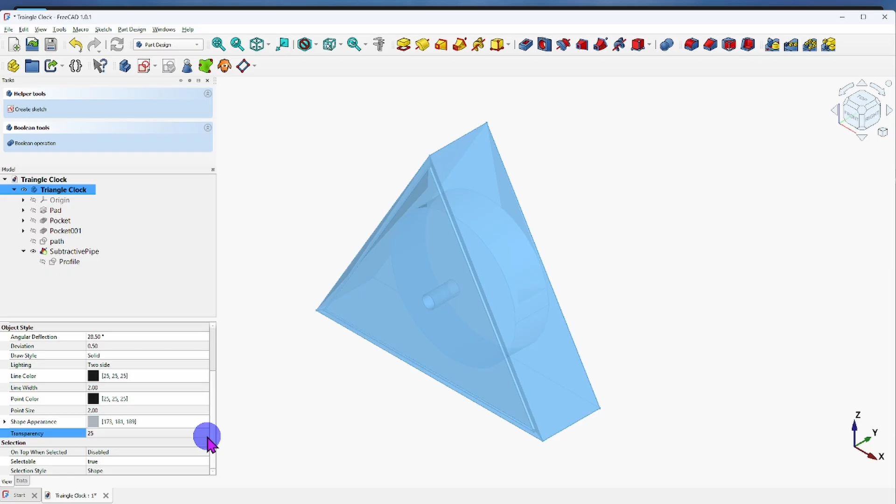But I'll scroll down. What I usually do, if I just want to see the lines, is click there and go down—5%, 10%. It looks like around 25% would be good. I just click out here anywhere, and you can zoom in and around. Now you can see inside your object a little better. That is useful in some applications. It may not be useful to you, it may annoy you, but it helps me sometimes when I've got multiple parts and I'm trying to see through the object while designing it.

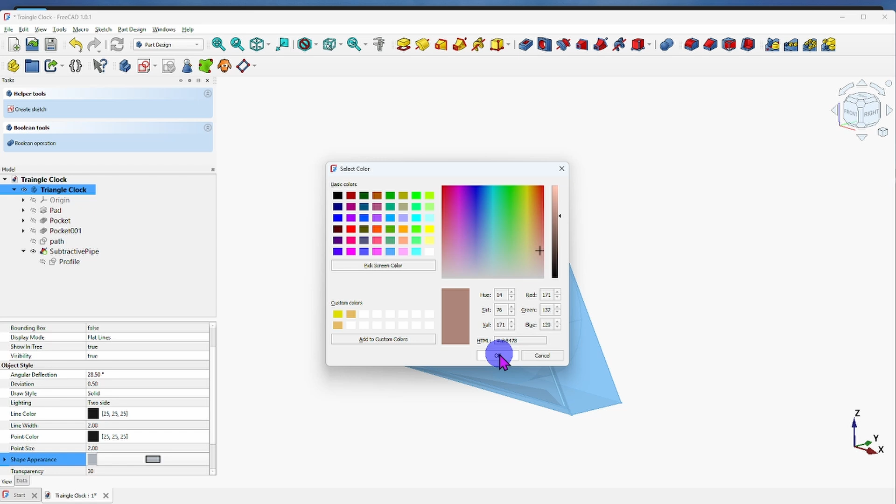So let's go back to the triangle clock, select that, come down to transparency. Let's go ahead and change the color of the whole shape. We've done that before because we've used these kind of wood-like textures that end up looking like bronze or copper. I'm going to select that since we created it in the last video. Then you can slide this slider up and down to darken or lighten it, and you can also drag it around until you get a color you like. But since we're working with wood, or trying to, I'm staying in that family of wood colors—that's more like a brown. Let me just hit OK on that and close out. So there we go.

It's transparent. Let me hit clock again and remove the transparency. We're at 30, I can arrow down, but I'll just type 0. Then click anywhere out here in the view area. And there we go.

All right, I've been looking into putting textures onto these items we're building that are supposed to be made of wood. I've got to get through maybe two more videos to get you, if you're following along with me, to get your level up a bit more. Then I'll probably introduce some textures. FreeCAD doesn't have any built in, but you can go to other websites and look for free texture downloads, drop them into FreeCAD, and use those to apply textures so it looks like wood.

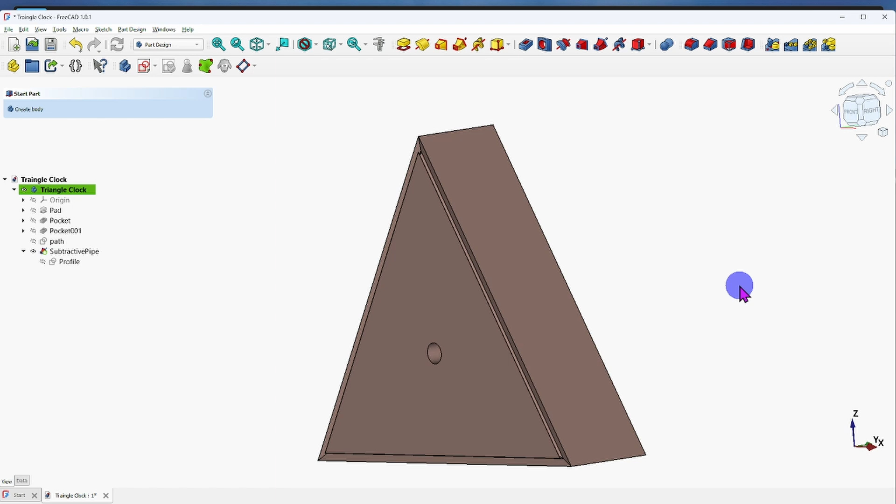But honestly, I get pretty good results from taking something like this, doing a screenshot, and dropping it into an AI. There are many of them out there that will do pictures for you. Drop it in, then ask them to generate this model with a wood grain, and name the wood grain you want—mahogany, or maple, hardwood maple, something like that. You'd be surprised at what it gives you.

The only issue I've had with that so far is, you see these lines right here? You have to right click on the screen, go to drawing style, and go to shaded. But then you lose the edges, and it makes it more difficult for the AI to determine where the edges are to put the wood grain on. So that would be the only downside of putting it into AI—you'd have to deal with these edges.

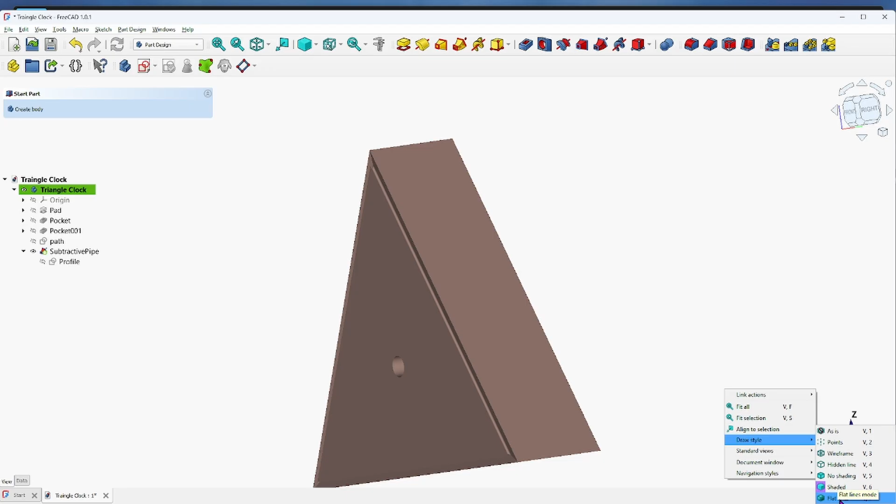We go back here. You could do no shading, but that doesn't look very good to me. Some people may like that drawing style, but using flat lines gives you the shading and also shows you the edges, the hard edges.

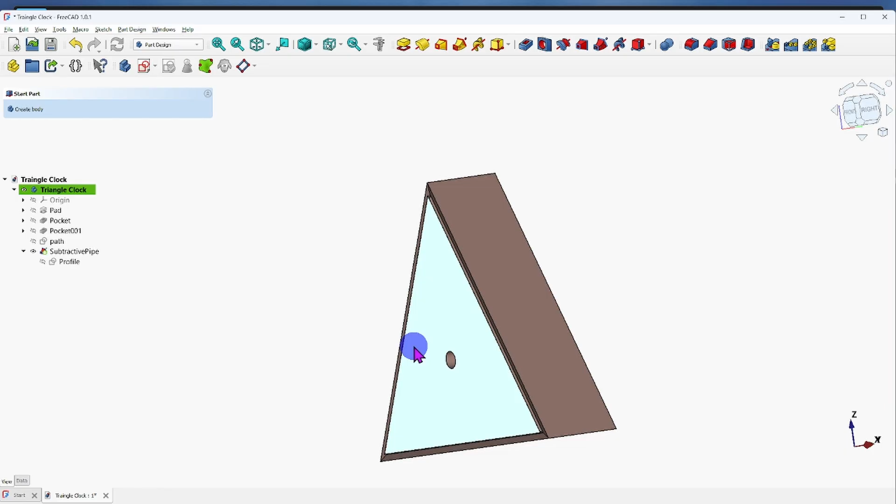Once I get textures loaded into FreeCAD, I'll show you how to do that, and maybe some websites that have free textures you can drop in and use for this shape. Instead of a solid color, you'll see wood grain. Some textures are intelligent enough that the wood grain follows the face and the end grain is on the edges. Back in 2017, when I was doing guitar bodies, every face would have wood grain with no wood edges. It just didn't look right. But they're far enough along now that it looks a lot better.

Sorry, I'm not trying to confuse you, but there's more to learn here, so be patient. I'll show you how to do the wood grain stuff. We'll get to that.

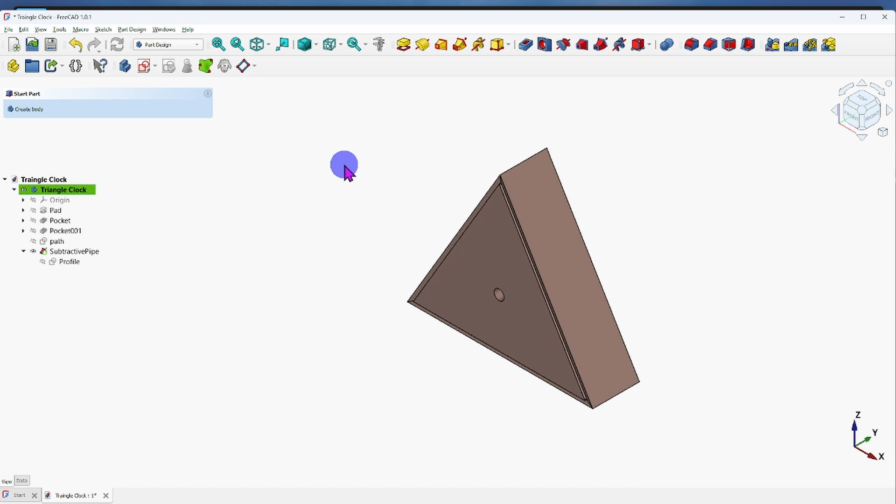I think I need to wrap it up here. I'll go up and select ISO mode, put it where I need it, close out of there, exit and save. And back to me. There you go.

That was a little shorter, I hope, than the other videos. You saw the issues I ran into - those were unexpected. If I really wanted to be polished, I could have drawn this clock three or four times and shown you the perfect way to do it without any mistakes.

But that's not what FreeCAD is about. When you learn FreeCAD, you encounter these things, and sometimes it's nice to see somebody figure it out. I was able to get my task panels back, but they weren't behaving like they were originally, so I'm going to figure that out. I've got some things to iron out that I've learned in this video, and I'll try to present those in the next video or two, maybe after I finish this series, which is probably two or three more videos.